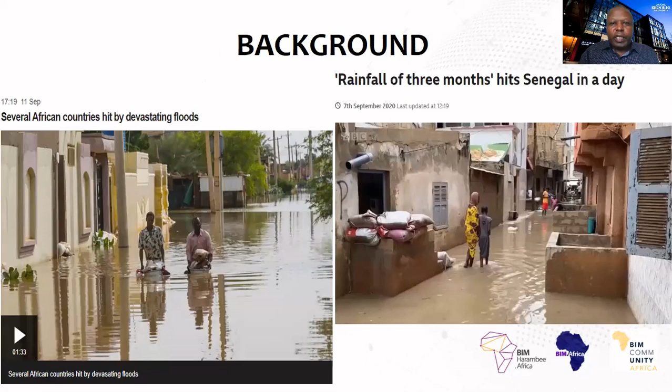These are floodings that recently happened in Senegal. And then we have a similar situation on the 21st of August, 2020 in Douala, the economic capital of Cameroon. Scenes like this are actually common today in many African countries and many parts of the world.

At the time of this presentation, there are still wildfires raging over the state of California in the United States. It's been causing a lot of havoc. So there is an urgent need for us to be able to do something such that we don't have such occurrences due to climate change.

In order to do that, we have to examine the different sectors of the economy and how they affect our climate. One that I'll be focusing on in this presentation is buildings and construction, which account for more than 35% of global energy use and nearly 40% of energy-related carbon dioxide emissions. You can see that on those pie charts.

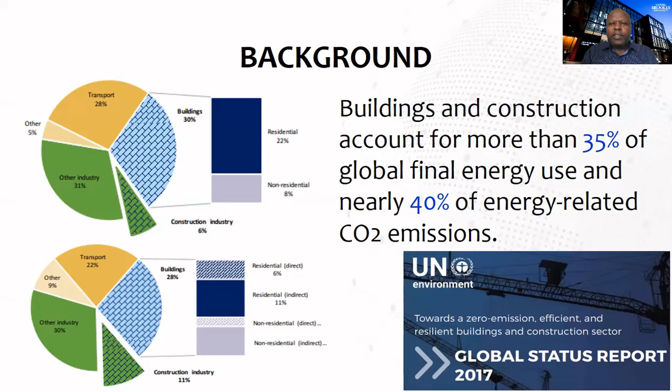That is from the UN report, the Global Status Report 2017. Contributing 40% of energy-related emissions is quite significant, given that there are many other sectors of the economy.

I would like to define embodied energy, embodied carbon, and building information modeling, just for purposes of this presentation. Embodied energy / embodied carbon of a building is the energy expended in the extraction of the material, and the energy related to the transportation of the material to a construction site.

In some publications, they call that initial embodied energy: energy involved in the extraction of material from the source and transportation to site. Then they separate it from what we call recurring energy, which is energy expended to maintain, replace a material, or even recycle or dispose of it after its useful life. But in a nutshell, for now, let's accept that embodied energy and embodied carbon are energy and emissions associated with the extraction of raw material from its source to the construction site.

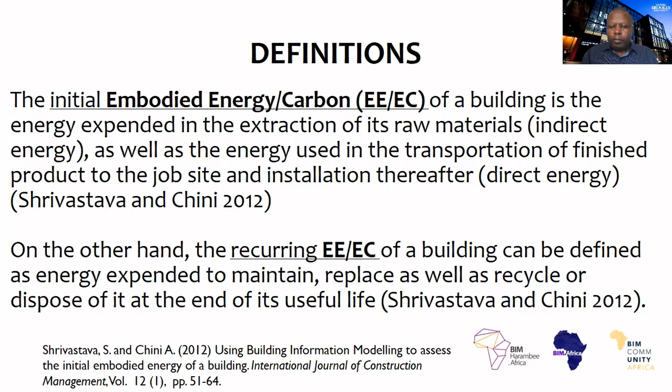Then I also define BIM. Why am I defining BIM? Because this is an application of building information modeling in assessing the performance of buildings with respect to their embodied energy and embodied carbon. So BIM is defined as an innovative and collaborative way of working that is underpinned by digital technologies. That is the UK Construction Industry Council definition.

Another definition, by Mott MacDonald, is a coordinated set of processes supported by technology that add value by creating, managing, and sharing the properties of an asset.

From both definitions, BIM is actually a collaborative way of working that can be underpinned by technologies — not technologies, as many have been saying, as is common to hear from young or recent graduates calling BIM a technology, or calling Revit a technology, which is just a tool that can aid in that collaborative way of working, or that can aid in managing the data that can be used in managing construction processes.

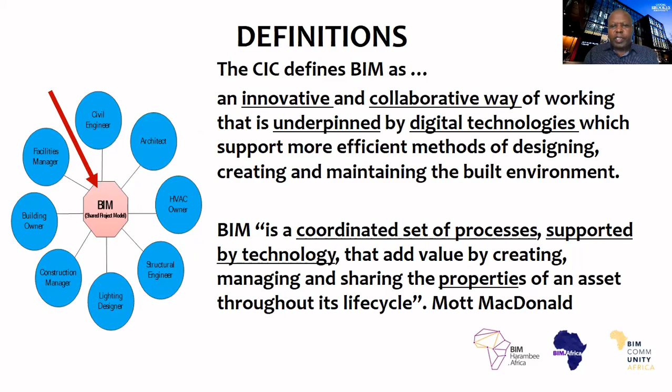Now, I'm talking about processes - what are the processes of construction that issue from different types of applications? These applications are what I would call BIM applications.

Of course, I'm not going to focus on 1D, 2D, 3D. The D stands for dimensions. 3D is our geometric model, 4D is project programs, so project scheduling, 5D is cost estimation, or 5D BIM, and 6D is sustainability.

4D, 5D is a consensus in the industry as to what they mean. 4D is definitely project scheduling, 5D is cost estimation. In some books or publications you find 6D to be facilities management, and in some you find 6D to be sustainability, or the other way around. So there's no consensus from 6D onwards - it can be used differently in different textbooks or publications. But 4D, 5D, there is consensus in the industry as to what they mean.

Our focus will be on sustainability, and specifically on embodied energy and embodied carbon, which I've defined earlier.

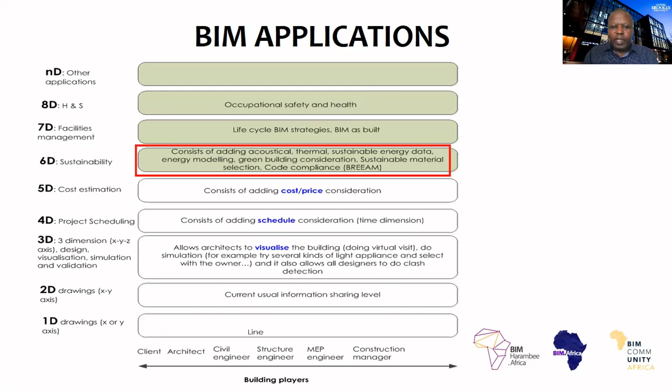Now, why is it important for me to use BIM in order to compute, assess, or calculate the embodied energy of buildings? As a reminder, embodied energy is energy used in extracting material from its source and transporting it to site.

Similarly, embodied carbon is the carbon emission that is emitted when extracting material from source and transporting it to site. So I will use carbon, but in my calculations you're going to see carbon dioxide. We definitely know the chemical equations between carbon and oxygen leading to carbon dioxide, so if I use carbon or carbon dioxide, we can compute one from another very easily from our knowledge of chemistry.

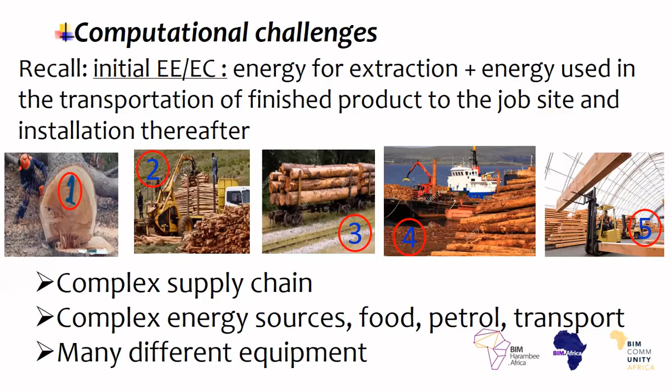But I'm going to simplify the calculation using the formula presented there: EE, embodied energy of a given material K, equal to the summation, the sum of 1 plus xi, times the quantity K of that material, times the intensity IK. That xi is a waste factor. Same for embodied carbon - the waste factor there is lambda, and the intensity there is tau.

Going back to the building I showed you earlier that I was going to use in my computation, the building in London, I've zoomed into the foundation there, and my calculation will focus on figure 1B, which is the pile, the concrete pile.

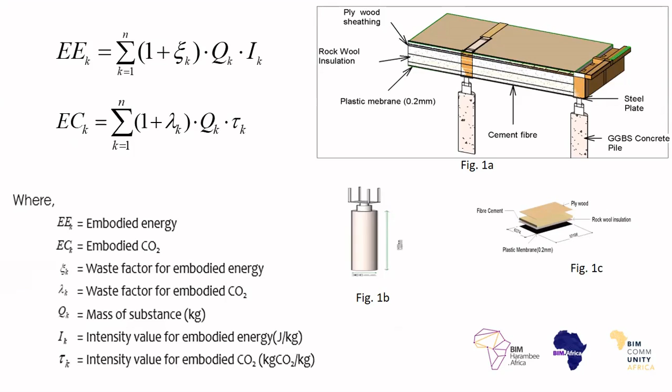Now, let's assume that the construction waste is 0. Then the simplified version of the formula will be embodied energy, which is quantity times embodied energy intensity, and the units are kilogram times megajoules per kilogram, such that the kilogram cancels the kilogram, and you are left with megajoules, which is dimensionally consistent.

Then we also have embodied carbon, which is the quantity times embodied carbon intensity, which is kilogram times kilogram carbon dioxide divided by kilogram. Again, the kilogram cancels out, and we're left with kilogram carbon dioxide.

Then we also have cost - just to understand that formula, let's go back to cost. Cost is really given as quantity times unit cost. The quantity could be in kilogram, linear measurements, volumes, or meter square, times unit cost, which is pounds per kilogram, pounds per meter square, or pounds per meters cube. If you cancel the kilograms, you get a cost in pounds, or it could be in shillings, or francs CFA.

Similarly, we have cost of concrete, which is quantity times unit cost, like meter cube of concrete times pounds per meter cube, and then you are left with pounds.

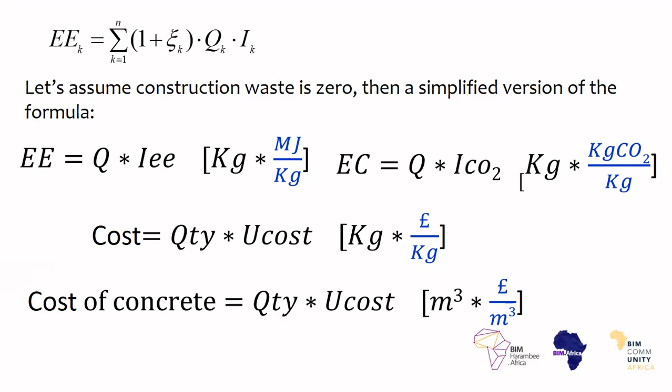Now, the question is, where do you find those intensities? Just like in my previous slide about cost, we have unit cost, which you either get from suppliers or from professional databases or professional books. In the case of the UK, we'll get it from what we call SPONS, which is widely used, or the BCIS database.

So for the embodied energy and embodied carbon intensity, we have a table developed by Bath University, usually called the Bath Inventory of Carbon and Energy. This is quite useful for estimating the embodied energy and carbon dioxide of buildings, and some countries have their own as well.

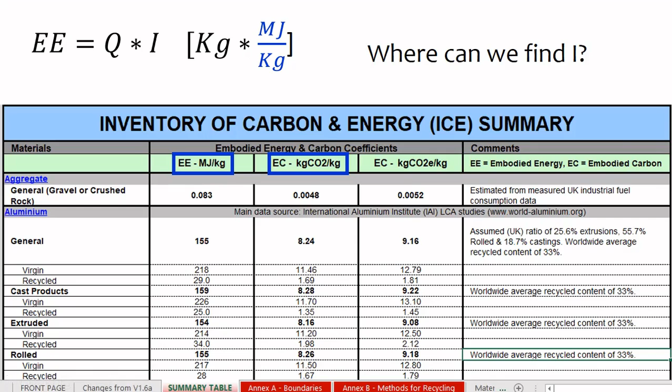Going back to the concrete pile, what do you need? What are the elements or the data you need to calculate embodied energy? First, you need a material inventory. You need to know the different elements or materials used in your project. Then you need an emission inventory database.

An example is Bath ICE. And then you need material density tables. The reason you need these is because usually most of the time you're going to get your materials in volumes, or meters cubed. If you have the material in volumes, you can use density to get kilograms, because our Bath inventory units are megajoules per kilogram or kilogram carbon dioxide per kilogram. So you need densities in this case.

Now, to calculate the mass of the prefabricated pile which I'd shown you previously, you would need the volume, because through volume and density you can get the mass. The volume of that pile is calculated as cross-sectional area times height, which is pi r squared times height. The height of that pile is 1.5. If you substitute those values, you get volume is 0.106 meters cubed.

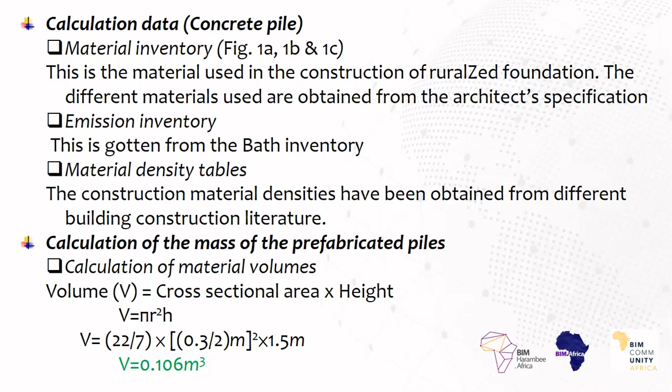In general, the quantity of any material is given by its density times volume. Given that we're dealing with a prefabricated concrete pile, the density is 24 kilonewton per meter cubed, times 0.106 meters cubed, and that gives us 254.4 kilograms of prefabricated concrete pile.

Then for the total embodied energy, we now have to go to our Bath ICE and read our embodied energy intensity. Doing that for concrete, it is 2 megajoules per kilogram. Multiply that by the quantity to get 508.8 megajoules.

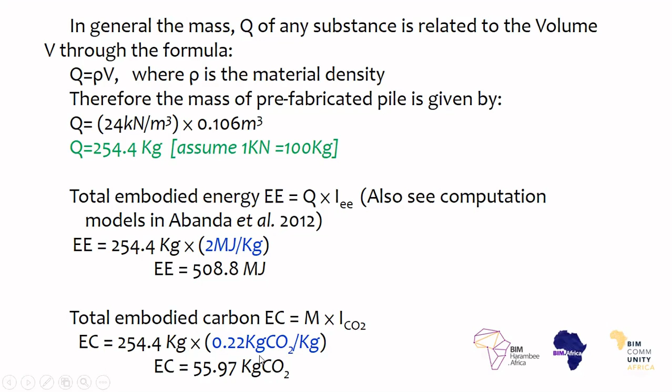Similarly, we have to look for the corresponding embodied carbon, which is 0.22 kilogram carbon dioxide per kilogram. Multiply that by the total quantity, and you get 55.97 kilogram carbon dioxide.

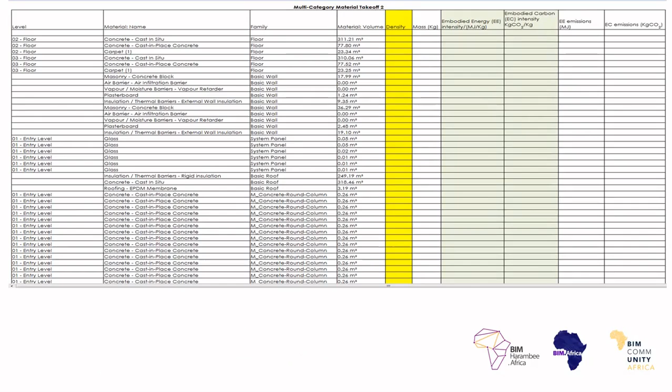Now, if you do that for all the materials, we may end up having a spreadsheet like this. Just imagine having to do that for every material in a building. How many components are there in a building? There are so many different components. So it is quite exhausting, tiring, and error-prone if we were to do it manually, as I've done.

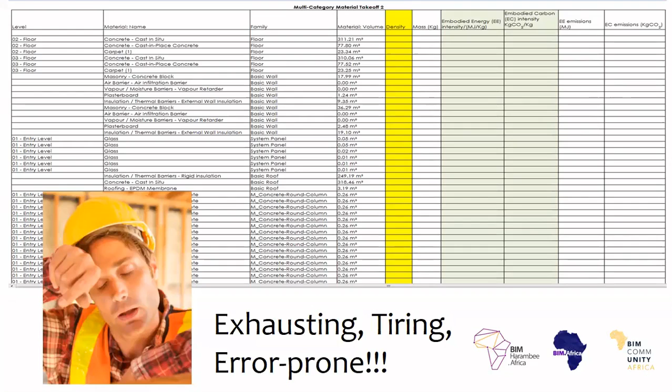So even when we do that, we have to organize our data in a standard way compared to what we have here. This is what we usually get if we do it manually and not organized. But if we organize it, we should be having something like this, similar to our bill of quantities, structured according to work breakdown structure.

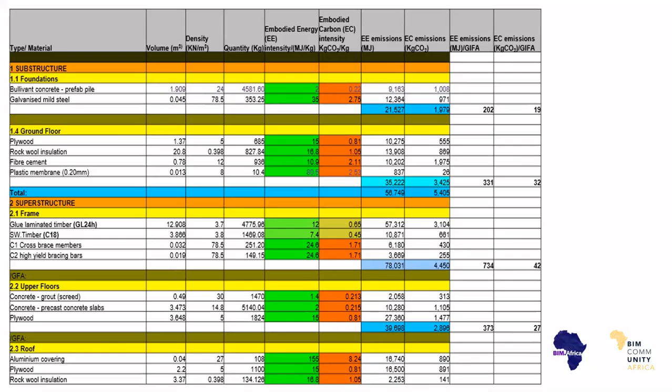We can determine the embodied energy for substructure, superstructure, services, and then we can align it with the cost. If we have the cost by the side, we can make a judgment that the substructure is emitting this amount of emissions, and the cost is this, and decide whether to change our material for lower emissions and perhaps higher cost, or go for cheaper material with higher emissions. It really depends. But we should be able to compare our emissions and energy wasted in construction materials with cost in a very structured and organized way.

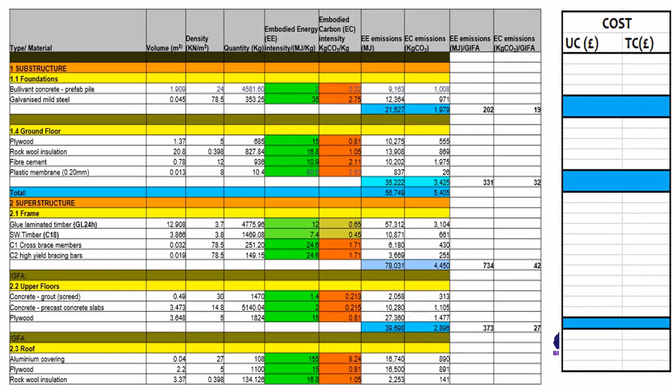So I'm now going to show you a demo on how to do this using BIM, instead of calculating as I've done in the previous slide. So I'm going to do that now using BIM.

To do that, I'm going to use this building, which is quite complex and usually comes with Revit when you install it, one of the leading BIM designing tools. Then you can access the embodied carbon or embodied energy database inventory developed by Bath University through this link. That's a screenshot of the page. If you click this link, you can access and download the full database from there.

So we need quantities now, and then we need embodied energy intensities. How do we calculate the quantity from this building? Of course, we can do it manually, which we don't want to do. We've established that doing it manually is error prone.

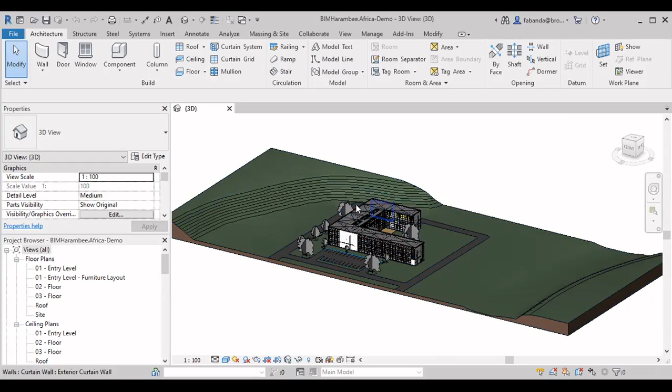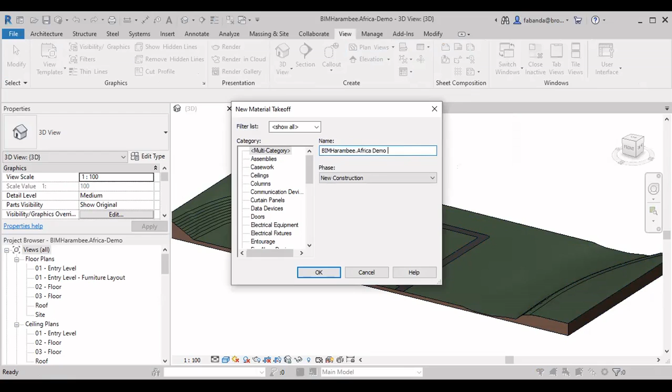To do that using Revit, we usually go to our view and then go to material takeoff. Here, I'm just going to generate quantities from the whole building. I'm going to call this one BIM Harambee Africa Demo 1, and then say OK.

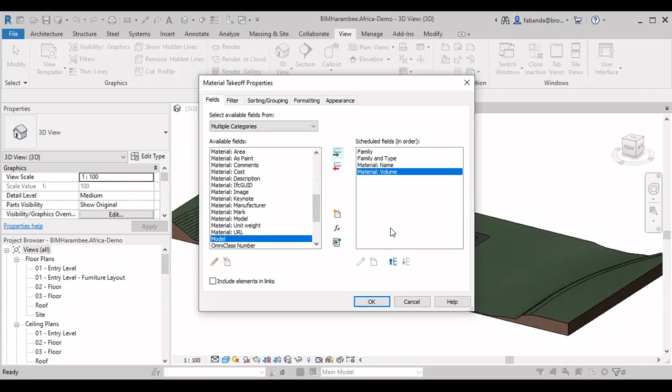And then I'm going to cross some of these properties across: material name, we want to know the material name, whether it is concrete, and then we want the volume. Just for now, let's leave these 3 properties. Now, also, let me go to formatting and show you something.

If I go to volume there, I can actually change the unit, because you can see volume there means meter cube. I can actually go out here and say I don't want any units. But for now, let me leave units there and then generate quantities automatically.

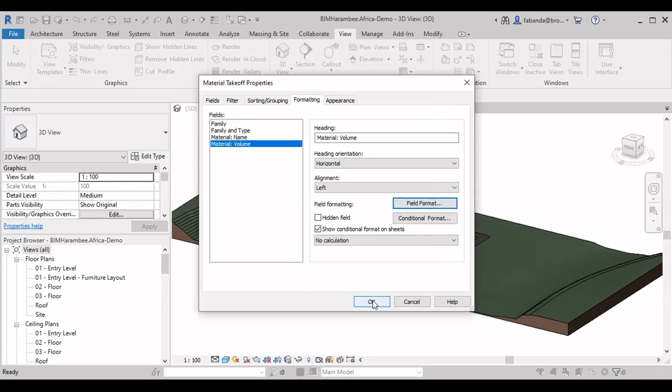Okay, we can now see the quantities have been generated automatically. And you can see there's a cast in situ concrete there. The quantity is 311.21 meters cube. Now I'm going to generate another one.

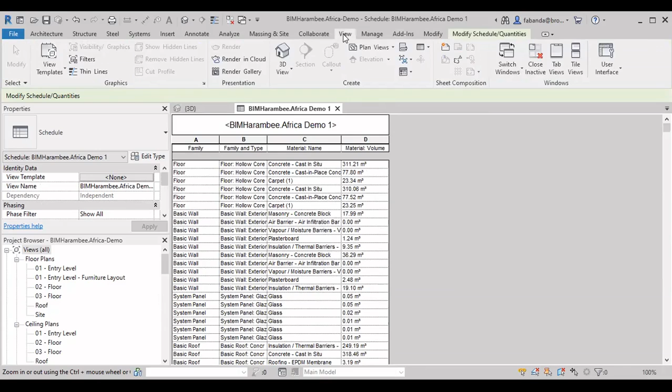I'm going to generate another quantities here for reasons I'm going to explain later. So we have material takeoff. Again, I'm going to say BIM Harambee Africa Demo 2, then okay.

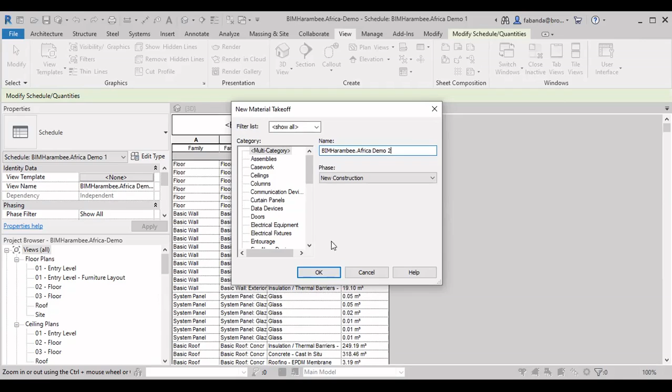I'm going to look at family type, cross it over, material name - where's material name? That's it there. And then material volume, whatever there.

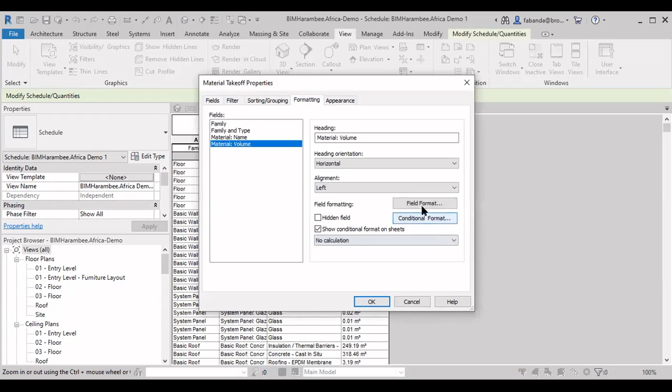Then now, in my formatting, I'm going to go back to volume and then change formatting. I'm going to say none for the units. Are you going to see the difference? Now, when you look at this, the difference is that you don't have units here.

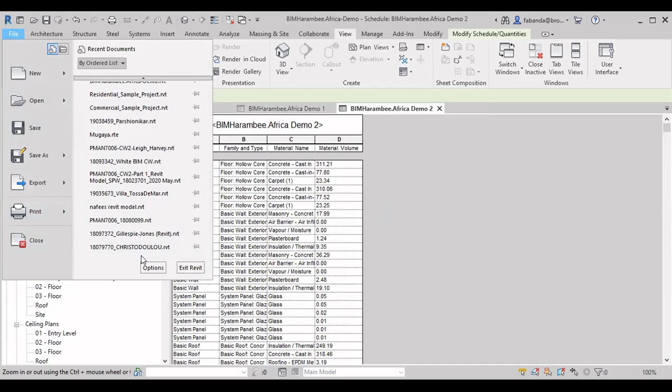You understand why. I'm now going to export this and do my computation in an Excel spreadsheet. So I'm going to go to File, Export.

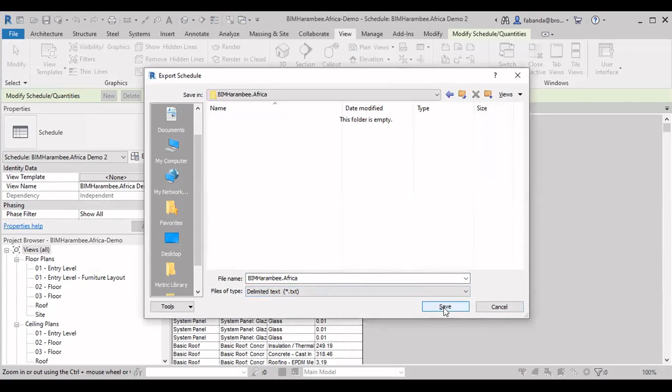Then go to Reports, choose Schedule. Once I choose Schedule, I'm using Demo 2 with no units. I'm going to go to the desktop and then choose the folder that I have this one in. This is a text file - take note, that is a text file. I'm going to say okay, okay.

Now, I need to open Excel to be able to read that text file. And to do that, I will now have to switch, and then go to this - go to an Excel spreadsheet.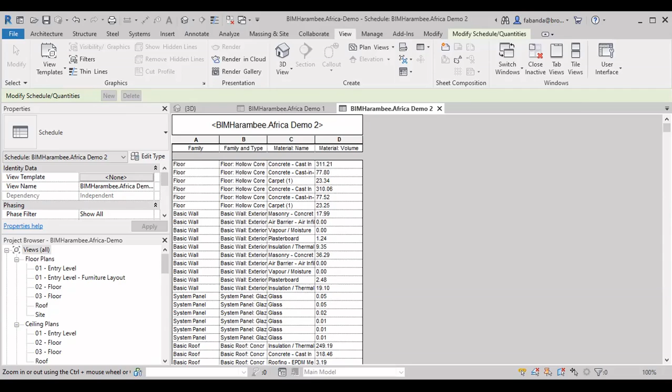Then browse this, go to my desktop. Then change it here to text file to see the file I've actually exported. Then I'm going to say okay, okay.

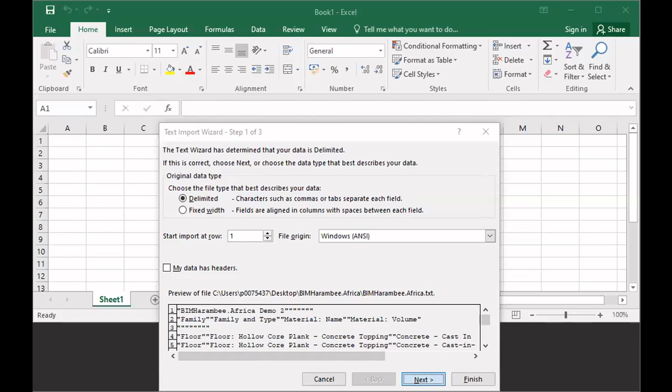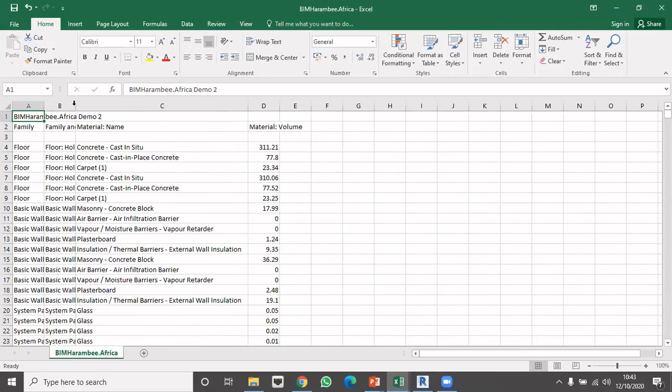So I have this, and you can see here at the top, that is actually BIM Harambee Africa Demo 2. Now we have our volume here, which is in meter cube. The reason I have this without units is if I had brought units here, it would be difficult for me to multiply numbers. So I just decided to remove the units as I showed you earlier.

So what I need now is to add another column for density, and then I put there kilogram per meter cube as my unit. Then I'm going to put embodied energy intensity, so I'm going to just put here IEE. And we know, of course, that this one is megajoules per kilogram.

Then I'm going to put here ICO2, and I'm going to put kilogram carbon dioxide divided by a kilogram. And if I put the density there, I need to insert here mass or quantity Q in kilogram.

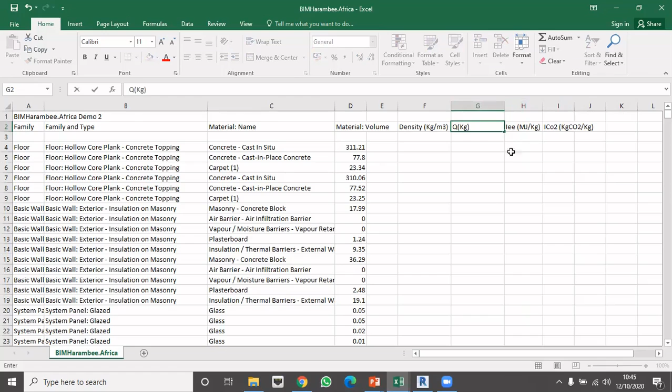Then I'm now going to put here embodied energy in megajoules, and then embodied carbon in kilogram carbon dioxide.

Then I have my quantity here, so I'm going to look for the density of this, which is 2400 kilogram per meter cube for concrete. And of course, the kilogram here now will be this volume times this.

And then I can now pull it to calculate the quantity for all the different materials, so clearly I won't struggle to multiply them. Now, I need to go back to my slide, and then I get the embodied energy intensity for concrete, for example.

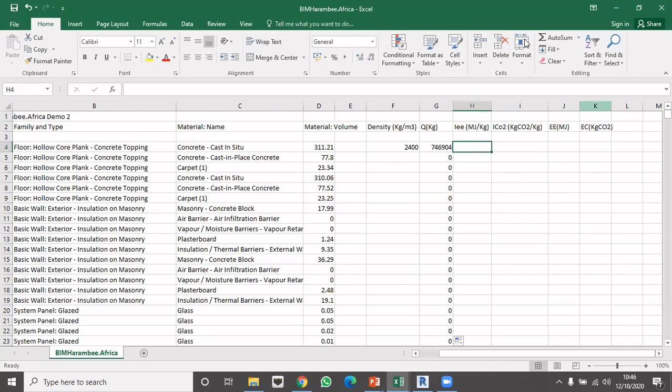I'm going to go back again. I apologize for the different shares. So I'm going to go back again and choose this, and then I'm going to enter the 0.74 and here.

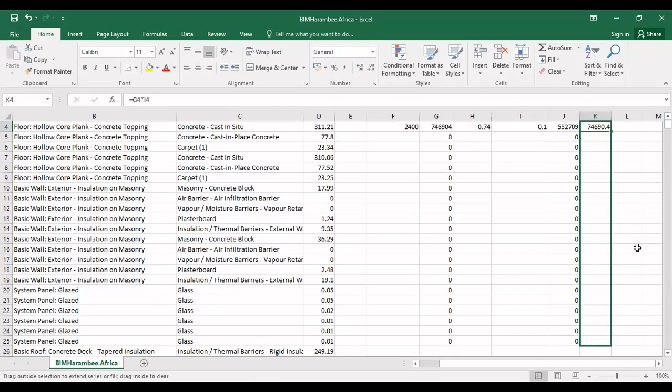0.1. Then my embodied energy there will be quantities in kilograms times that, and then this will be my quantity there times that. Then I can now just pull it downward, below. I can do the same there. And then it calculates for me. If I enter all the values there, I'm just going to get this automatically.

And I can actually put my cost column as well, by the side, and then compare my embodied energy and embodied carbon with the cost of the different elements.

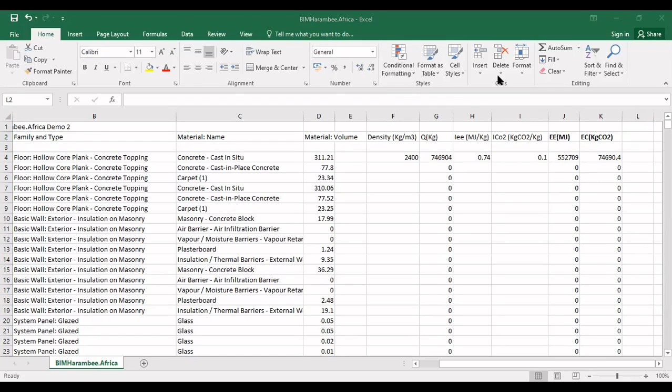Okay, so that is how you use Excel and Revit with BathICE to be able to calculate the embodied energy and embodied carbon, or carbon dioxide, of buildings. I'm going now to go back to my PowerPoint presentation and continue till the end.

So as some of the projects that we've done in the past that has to do with embodied energy and embodied carbon, some years ago we developed a plugin for Google SketchUp at the time, which is now called Trimble SketchUp. That plugin allows you to simultaneously determine the cost, time, embodied energy, operational energy, embodied carbon, operational carbon, and waste of a project as you are designing it.

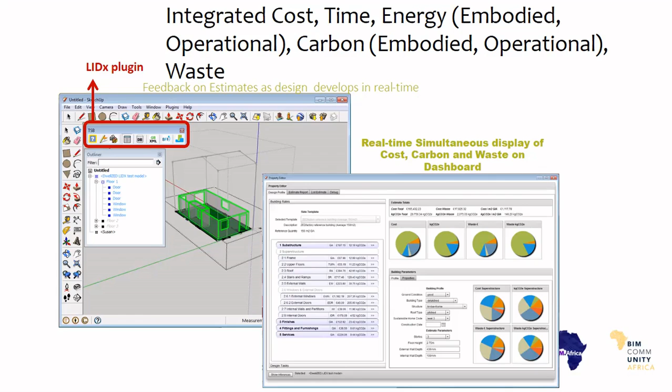So by the time you have 4 walls, a floor, and a roof, you should be able to see the cost, the time, the energy, carbon. When I talk about energy, it's embodied plus operational, and carbon is embodied plus operational, and the waste, on the dashboard, as you can see there.

We've also done the same with Revit, where we developed a plugin that allows us to measure simultaneously the cost, the embodied energy, and carbon dioxide, and then get the results on the dashboard, and align the results to standard measurement methods. In this case, new rules of measurement, which is quite commonly used in the UK.

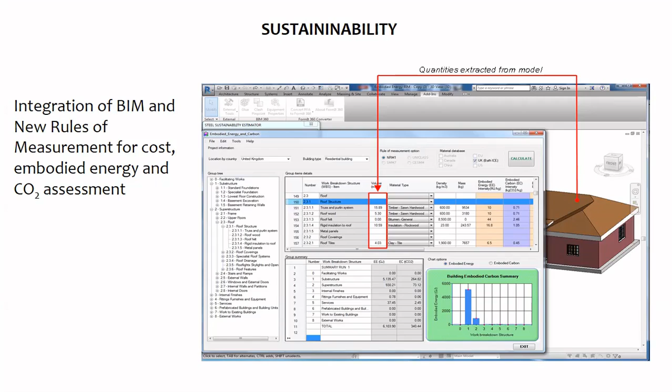So we started off by looking at the major concerns that we have nowadays, which is floodings, hurricanes that result from climate change. And then we went on to establish that there is a need for different sectors to contribute to mitigating the impact of climate change that is already affecting us. And we focus on the construction, the buildings and construction sector, which actually represents a significant amount of emission of greenhouse gases to the atmosphere.

And then we did our manual computation to illustrate how embodied energy could be calculated using calculating volumes of components manually, and then using BathICE together with densities of the material to calculate the embodied energy and embodied carbon. We saw that it was quite challenging or time consuming if we want to think about a number of materials that we have in a building.

Then we now came in with a proposition that we can actually use Revit, which is one of the BIM authoring tools, merge it with Excel, and then with BathICE, to calculate automatically, or at least semi-automatically, the embodied energy and embodied carbon of buildings.